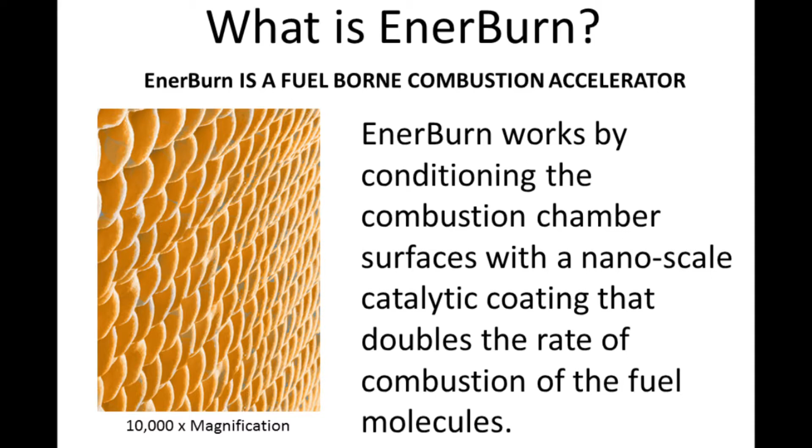Today we're going to talk about EnerBurn and the bulk tank dosing procedure. EnerBurn is a fuel-borne combustion accelerator. It works by conditioning the combustion chamber surfaces with a nanoscale catalytic coating that doubles the rate of the combustion of fuel molecules. This causes higher pressure earlier on the crank angle, which allows the engine to produce more work with the same amount of fuel.

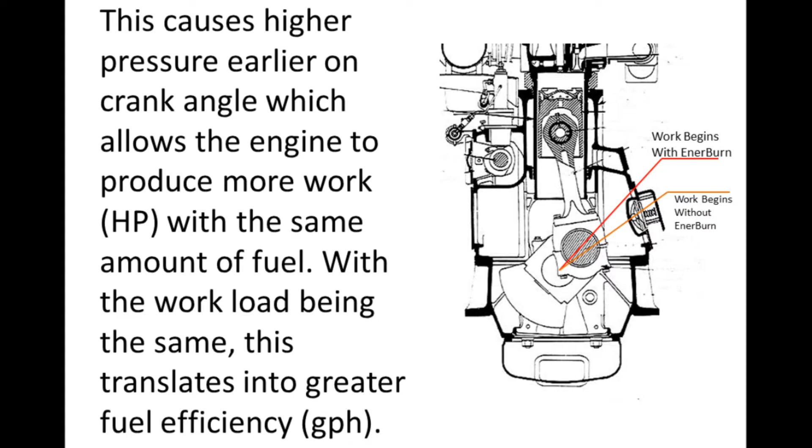The increased work conversion results in a reduction of the exhaust temperature, which reduces NOx production. EnerBurn also lowers the burn temperature of carbon. This reduces the amount of soot in the exhaust, reducing DPF regens, and reducing contamination of the oil.

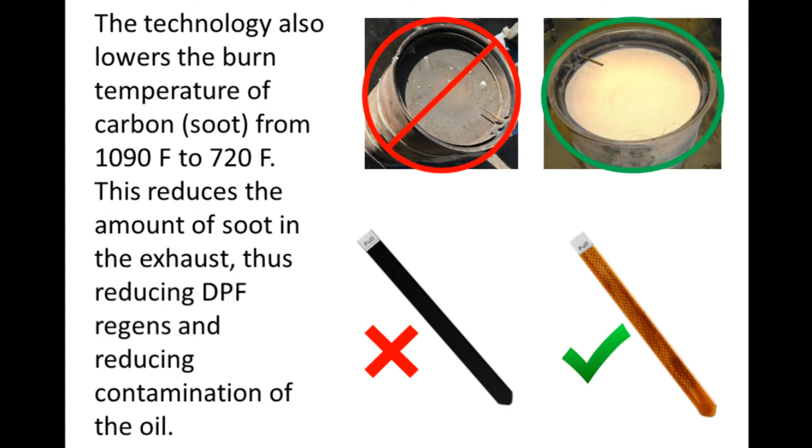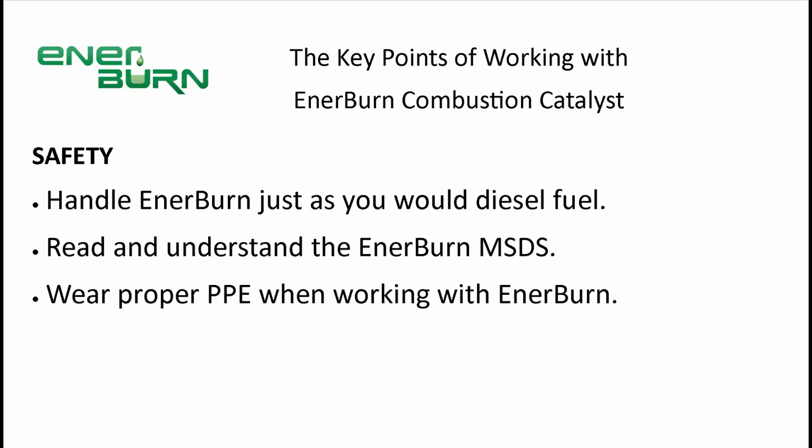Here are the key points of working with EnerBurn. Handle EnerBurn just as you would diesel fuel. Read and understand the EnerBurn MSDS. Wear proper PPE when working with EnerBurn, and clean up any spills promptly.

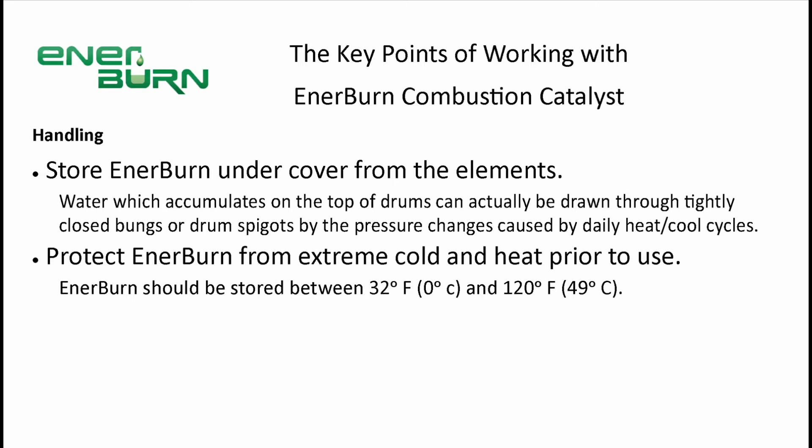Store your EnerBurn under cover from the elements. Daily heat-cool cycles can actually produce enough negative pressure inside the drum to draw water through tightly closed bungs or drum spigots. Protect your EnerBurn from extreme heat or cold prior to use. It should be stored between 32 degrees and 120 degrees Fahrenheit.

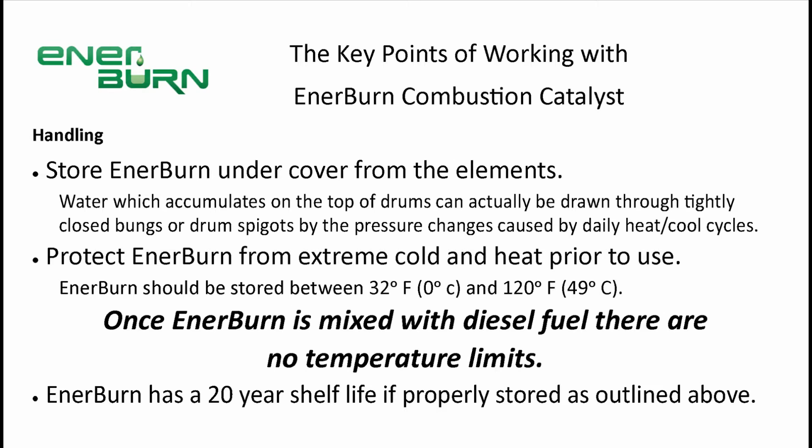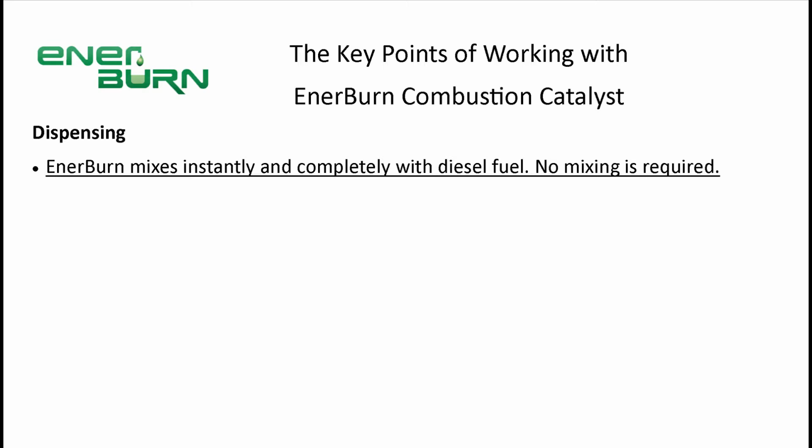Once EnerBurn is mixed with diesel fuel, there are no temperature limits. EnerBurn has a 20-year shelf life if properly stored as outlined above. EnerBurn mixes instantly and completely with diesel fuel. No mixing is required. Avoid splashing and spilling while dispensing.

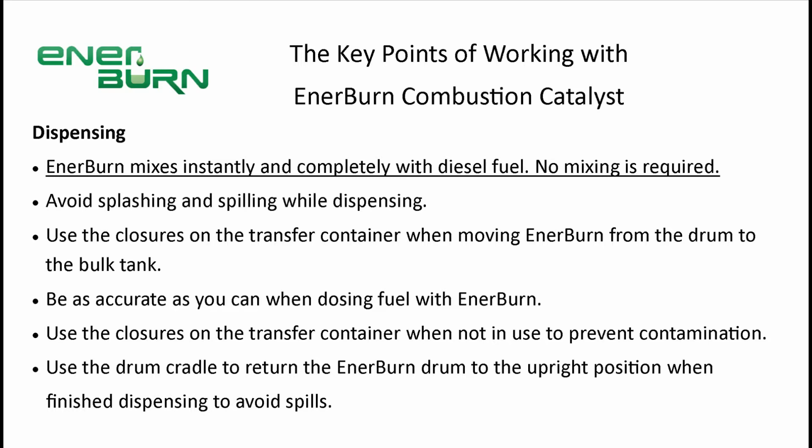Use the closures on the transfer container when moving EnerBurn from the drum to the bulk tank. And be as accurate as you can when dosing fuel with EnerBurn. Use the closures on the transfer container when not in use to prevent contamination. And use the drum cradle to return the EnerBurn drum to the upright position when you're finished to avoid spills.

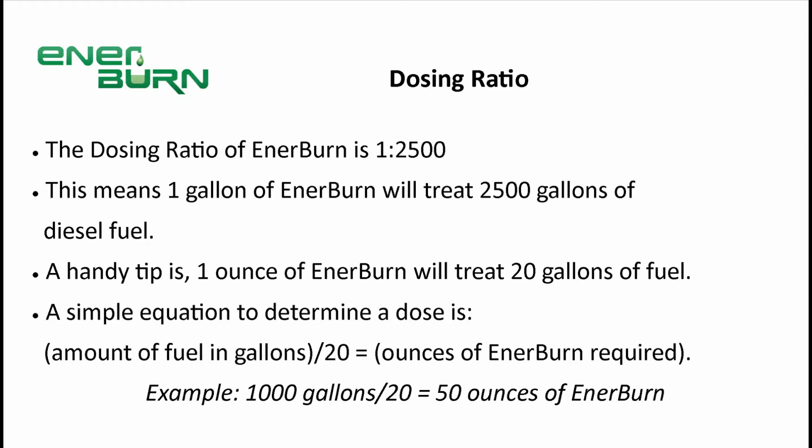The dosing ratio of EnerBurn is 1 to 2,500. This means that 1 gallon of EnerBurn will treat 2,500 gallons of diesel fuel. A handy tip: 1 ounce of EnerBurn will treat 20 gallons of fuel. There's also a simple equation. Take the amount of fuel in gallons divided by 20, which gives you the ounces of EnerBurn required. But don't worry, we're going to give you tools to figure out the dose.

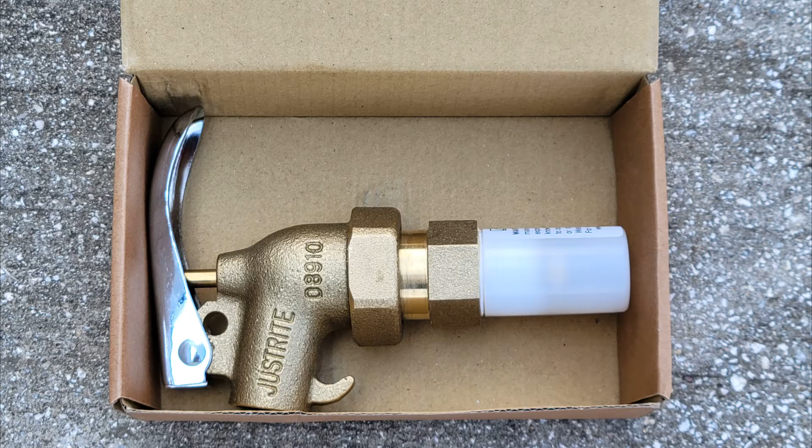EnerTeck is going to provide you with the tools you need to dose bulk tanks. These include a tilting drum cradle, a self-closing spigot, and a transfer container graduated in quarts and liters. Your tilting drum cradle comes in a flat pack and takes about 15 minutes to put together. The next step is to install the self-closing spigot in the 3/4 inch bung of the EnerBurn drum. The spigot even comes with the threads pre-wrapped with Teflon tape.

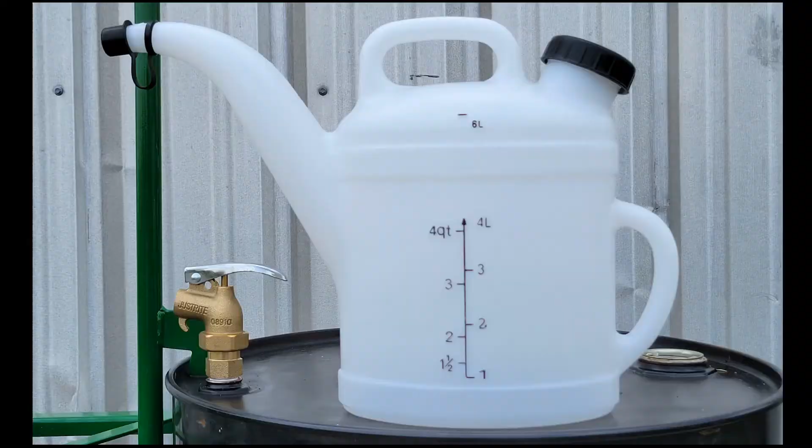You can turn the spigot a little past center to clear the handle on the tilting drum cradle. The transfer container is graduated in both quarts and liters. Depending upon the size of your average delivery, you may receive a 4-quart or 8-quart model. Another important tool is the dosing chart. It shows you how much EnerBurn to add per the amount of fuel added to the bulk tank.

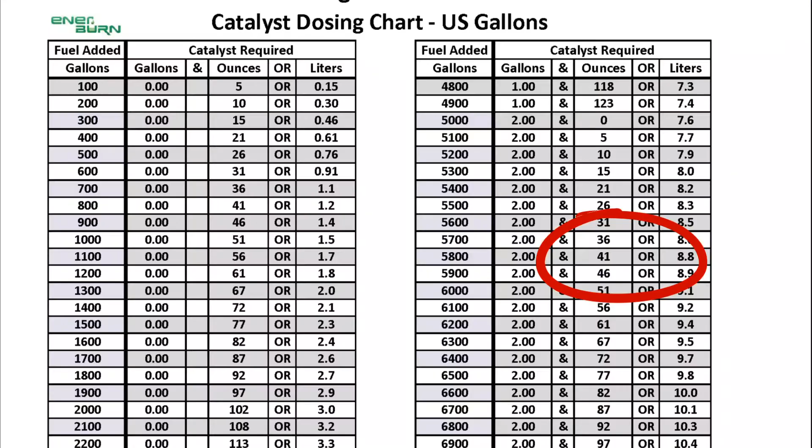To calculate the amount of EnerBurn required, take a look at the fuel ticket and determine how much fuel was delivered. In this case, 7,458 gallons. Round that number up to the nearest 100 gallons, in this case 7,500 gallons, and locate that number on the dosing chart. Here you can see that you will need 3 gallons of EnerBurn or 11.4 liters of EnerBurn.

We even have the EnerBurn dosing calculator. Download it by scanning the QR code on most of our products. It's even on the dosing chart. Don't forget to save it on your home screen so you don't have to scan the QR code every time. It's very simple to use. Just enter the amount of diesel fuel added to the tank, and the calculator figures out your dosage for you.

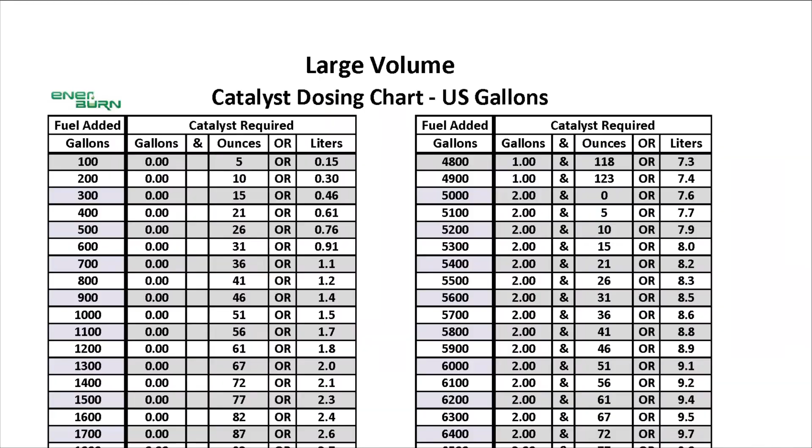When you're done, go ahead and hit the Save New Calculation button, which will clear the diesel fuel field and record your result under previous calculations. For a demonstration, we're going to use a delivery of diesel fuel of 4,800 gallons. So we're going to go to our dosing chart, look up 4,800 gallons, and we see the required EnerBurn dose is 1 gallon and 118 ounces, or 7.3 liters.

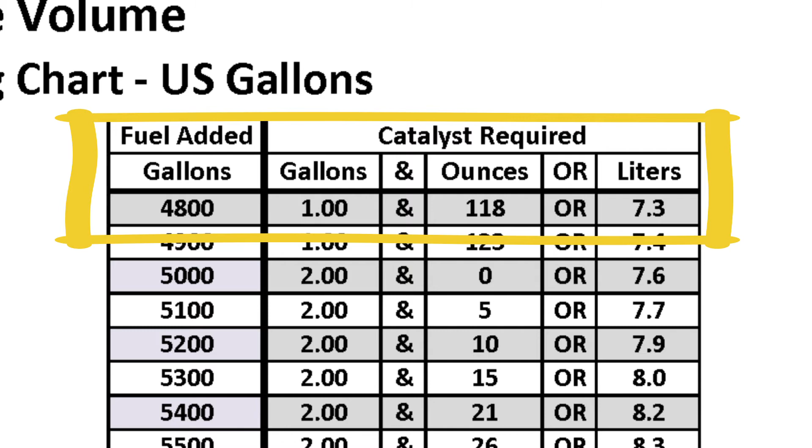I find using liters makes this procedure easier. You can also use the EnerBurn dosing calculator app to figure out the dose. We're going to be using our 4-liter transfer container, so we're going to need to do 2 fills, 1 to 4 liters and 1 to 3.3 liters. A handy tip is to use a grease pencil or a piece of tape to mark off the 1/10 of a liter position to help you be more accurate.

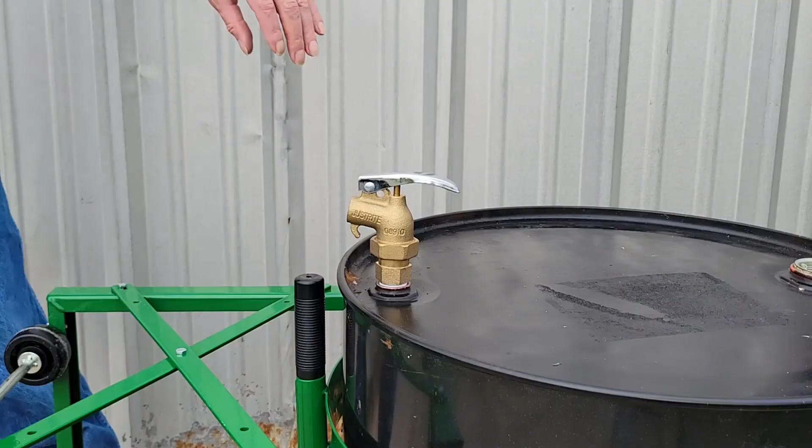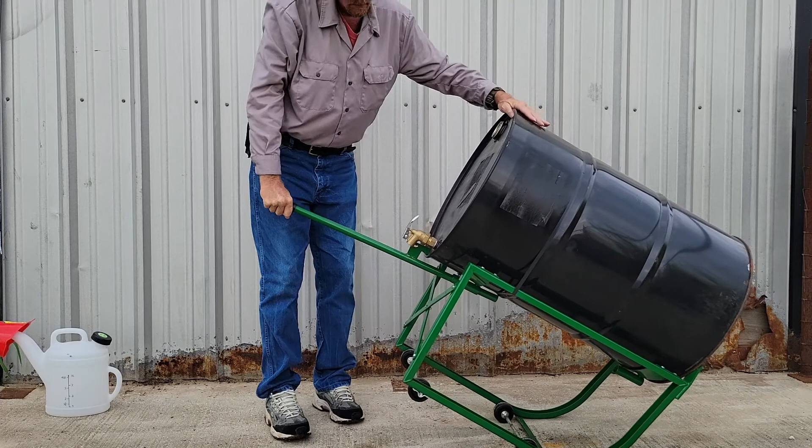Before we tip the drum, we're going to operate the valve to equalize the pressure. Carefully tilt the drum over with the tilting drum cradle. Stow the handle and place your transfer container under the spigot. I'm using a funnel here, but you could put a piece of hose in the end of the spigot if that suits your needs better.

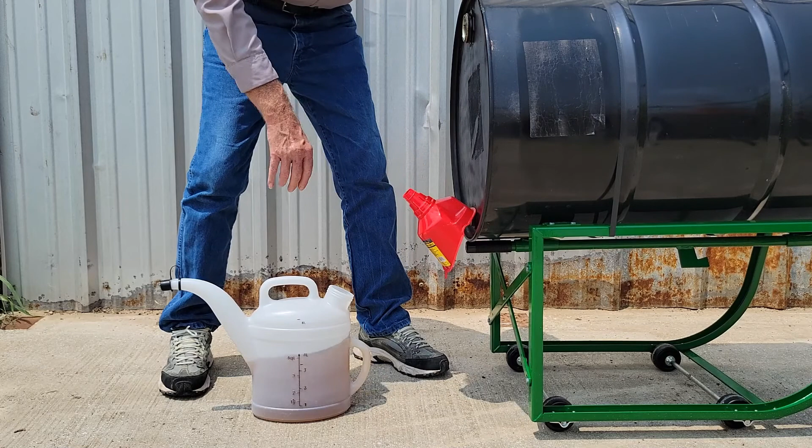Put the lid on the transfer container to avoid spills, and take your EnerBurn over to the bulk tank and pour it directly into the diesel fuel. Now we'll dispense our 3.3 liters. Again, put the cap on the transfer container and pour the EnerBurn directly into the diesel fuel.

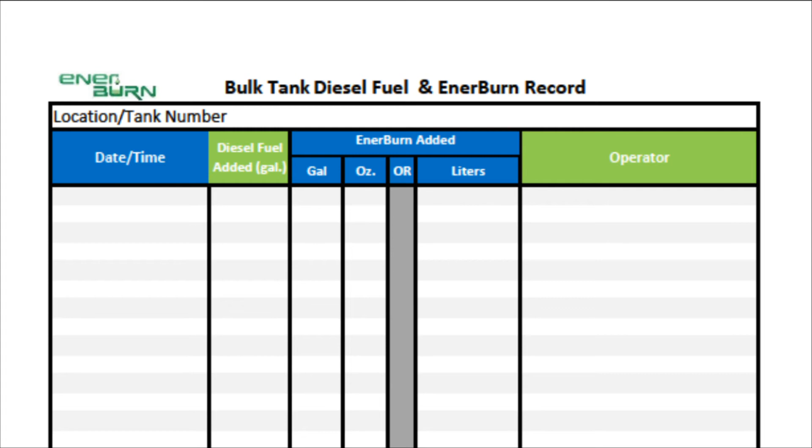When you've completed dispensing, use the tilting drum cradle to stand the barrel upright again. And of course, no job is done until the paperwork is finished, so fill out the bulk tank record with the date and time, diesel added to the tank, gallons and ounces or liters of EnerBurn added, and your name.

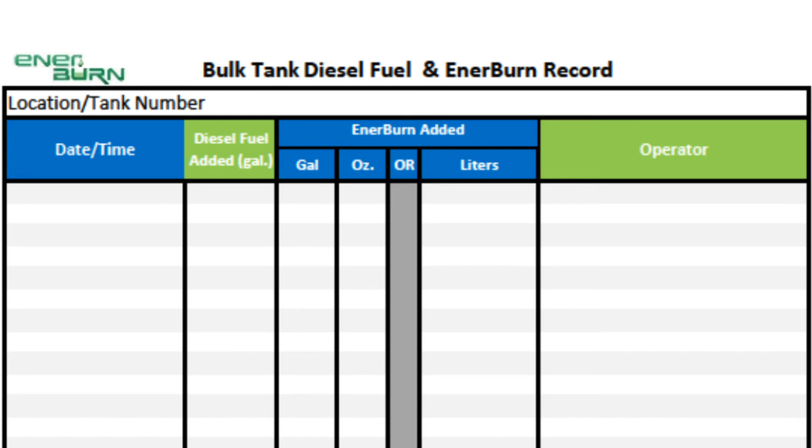Thanks for watching our video. We hope that it's provided you with the information you need to successfully dose your bulk tanks with EnerBurn.